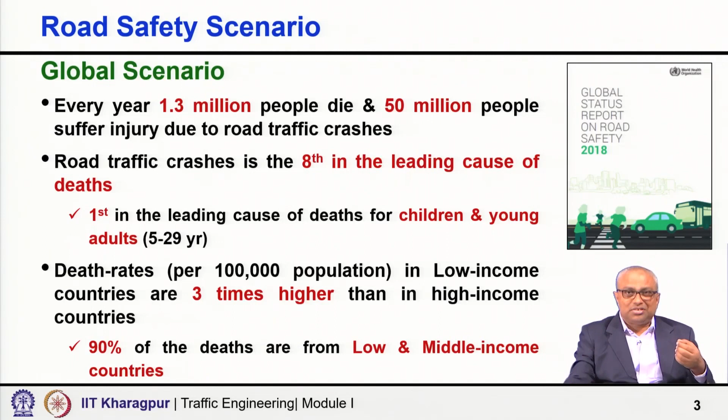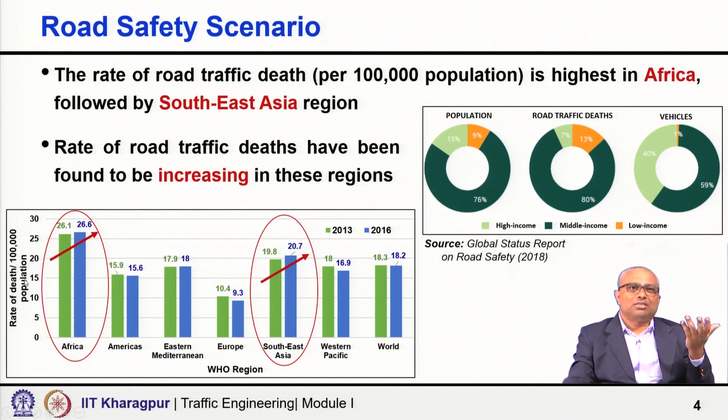The rate of road traffic deaths per 100,000 population is the highest in Africa, followed by Southeast Asia region. If you look at this figure, Africa here, Southeast Asia, the highest bar you can see is in Africa, followed by Southeast Asia, and alarmingly the rate of road traffic deaths has been found to be increasing in this region. I have tried to show you the upward trend in both regions, Africa and Southeast Asia. The present rates are highest in Africa, followed by Southeast Asia, and in both these regions there is an increasing trend in the rate of deaths per 100,000 population.

Now, if you look at the vulnerable road users and their involvement in road safety globally, you will see that pedestrians, bicyclists and motorcyclists are easily injured and killed in road crashes. The simple reason is they do not have any protective shell around them. So if they are hit, their chance or probability of fatality is very high.

These are all to be noted, because they give clear indications of what and how we should proceed further to mitigate the number of road accidents and mitigate the number of fatalities, bringing down the number of fatalities.

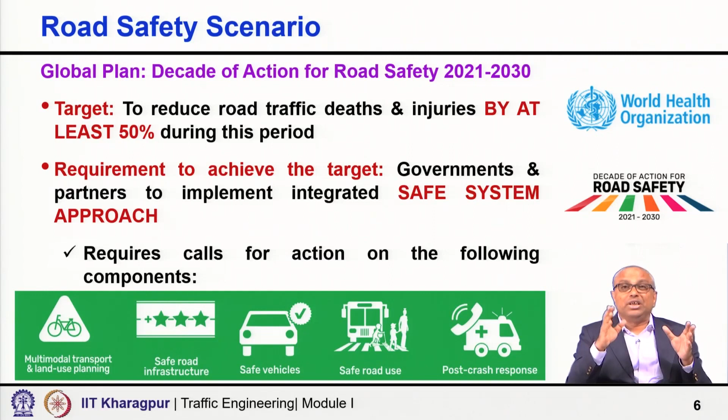Coming to the scenario in India - that was the global scenario. Now, coming to the scenario of India.

In our country, every year 150,000 deaths happen from 450,000 road crashes - not a good thing, very high. And here most importantly, the national highways, which actually include only 2% of our entire road network in the country, account for 35% of the total traffic fatalities - a very disproportionate figure.

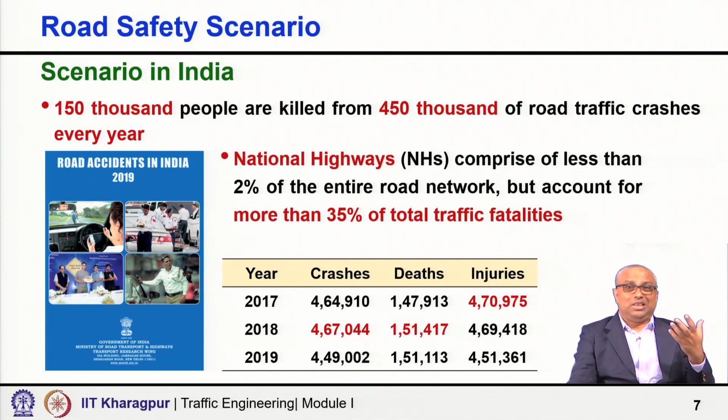So the national highways and also the state highways need to be handled in a much better way, and a relook is necessary in the way we are building them. It is important, no doubt. We need to develop our roads, widening to 4-lane, 6-lane dual carriageway standards. They are a necessity - the economy rolls on transport, and road transport has a very big role to play in the overall economic growth of the country. So we need it, but much more focus is required on road safety aspects. Something is definitely wrong with the way we are developing our infrastructure.

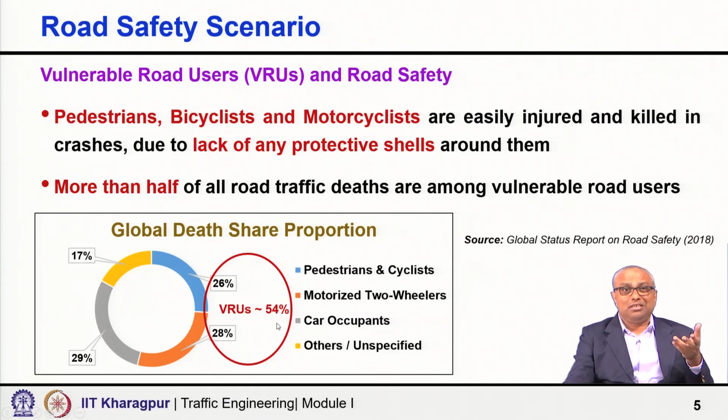If you compare the involvement of VRUs in the Indian context, it is more than 57%, not much different, because globally that share is around 54% VRUs, and here in the Indian case it is around 57%. The share of VRU deaths has increased compared to previous years, especially comparing 2018 and 2019 data - 2020 data, because of the impact of COVID, may be very different. So 18 to 19, motorcyclists are very high, and pedestrians too - the vulnerable road user share is again more than 50% in this case, showing an upward trend, very alarming.

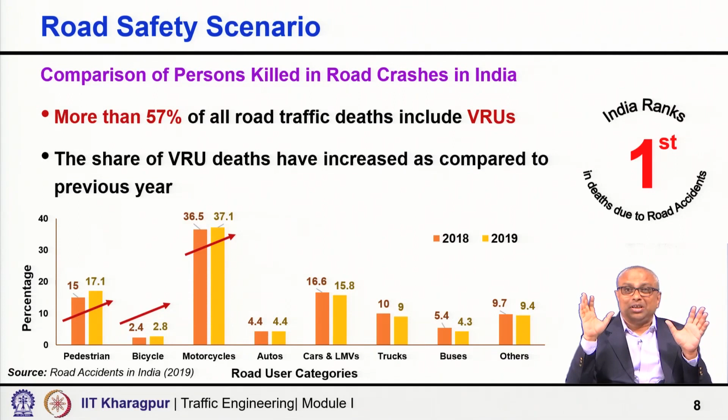And altogether we are number 1 in deaths due to road accidents. We must be very, very careful, and we need a scientific, systematic approach, looking at or accepting the reality. That is what is really important. We have to bring down the fatalities.

Let us look at the causes of road crashes. Why do road crashes happen? Global research indicates that there are 5 broad risk factors. Human factors, for example speeding, drunken driving, no use of helmet or seat belt, violation of rules, distraction - talking on mobile or texting while driving, this kind of thing. Altogether human error, that is one major area.

The other area is unsafe road infrastructure. As I said, creating a road and creating a safe road is very, very different. In many cases we have created infrastructure, but it is not safe infrastructure. So unsafe design and lack of facilities - that is the road infrastructure, road engineering aspect, I should say.

Then unsafe vehicles - in many cases the safety features are missing, and we are cutting down the cost, bringing down the vehicle price to make it competitive in the market, but where are we cutting? Cutting the corners. Where? Cutting the safety features. That again is one of the reasons.

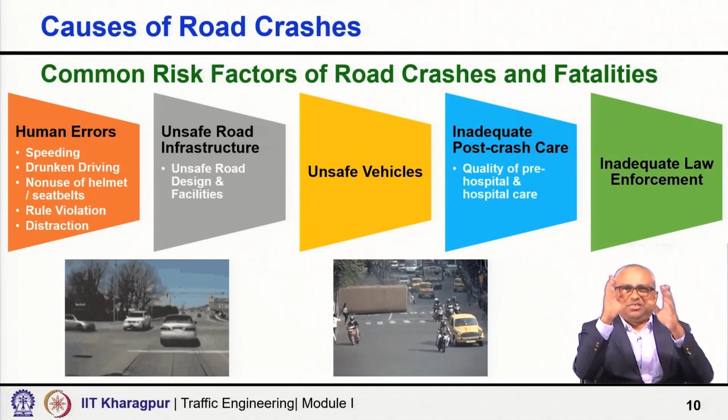So these are the 5 different pillars. In a simple format, who are on roads? People, road environment, and vehicles. So in a very simple way, road crashes may occur due to human factors, external or road environment factors, and vehicular or mechanical factors - somewhat a different way of regrouping these verticals.

These factors sometimes act individually, sometimes together in combination, to contribute to road accidents or road crashes. Look at these shares - there are quite overlaps. Human factors, solely or combined, contribute to 96%. Road environment or road engineering, directly alone or in combination with others, contributes to 28%. So better road engineering is really an issue too. And vehicle factors altogether, alone or in combination with road environment and human factors, contribute to about 8%.

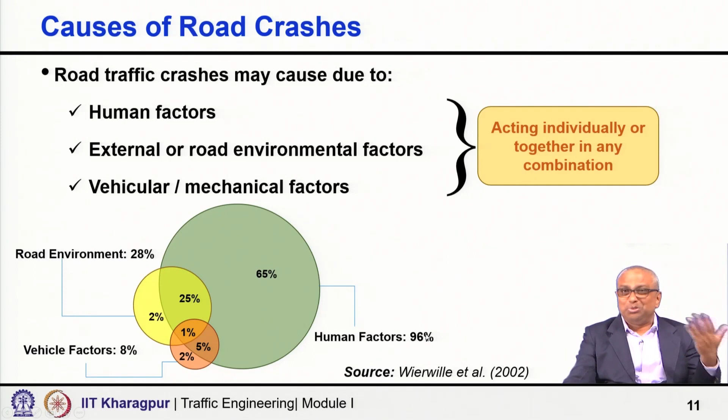Obviously, this 28 plus 8 plus 96 will be more than 100 because there are overlaps.

Now coming to the causes of road crashes reported in India, in the specific Indian context, what is happening? The human factors may include traffic rule violations, drivers driving without a valid driving license, non-use of safety devices, say for two-wheelers no use of helmet, or for motor vehicle four-wheeler users not using the seat belt.

So if you look at it, traffic rule violations have different shares. What are the kinds of violations? The major share you can see is speeding or over speeding. So speeding is a major issue. The infrastructure, the road environment, and the overall road traffic environment compared to the kind of speed that is happening are not compatible. Overspeeding is happening.

So overspeeding may happen because somewhere the posted speed limit itself may be higher than what it should be, and on the other hand there are plenty of cases where the posted speed limits are actually violated by motor vehicle users. So that is what is actually the reality. The share of road crashes due to rule violation, overspeeding or speeding, contributes to more than 70%, very very important.

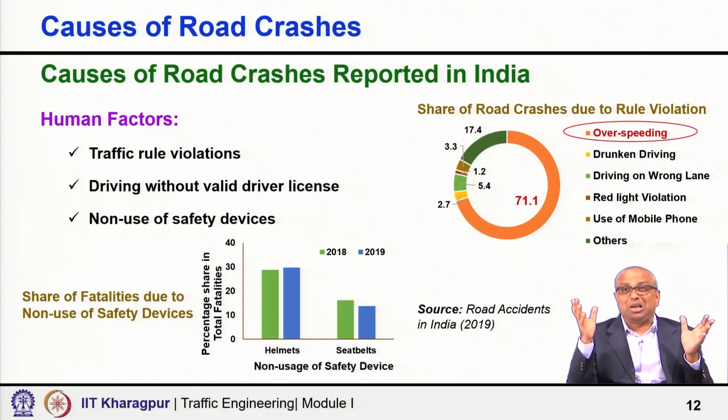Road environment factors may include land use type. What is the type of land use? You will find that national highways passing through areas which are like semi-urban development, markets are there, activities are there, schools, colleges, offices are located very close to the roadway, and there is no protection to vulnerable road users, no facility is provided, they are just simply crossing the road, looking at the gaps in the traffic, with no segregation, no protection to vulnerable road users.

Land use type, road infrastructure, say straight segment, curved segment, sharp curves, steep slope, type of junction and type of control I have already taught you, weather condition - all these are contributing to road accidents and fatalities, which we can call road environment factors.

Vehicular factors may include over-aged vehicle, the age of the vehicle, vehicle fitness is a major issue, and also the overloading of vehicles.

Yes, we cannot say that there is no action, no enforcement, but the same focus, continuous, every day, 24/7, 365 days in a year, same level of enforcement against overloading is missing. The vehicle fitness aspect has plenty of lacunas.

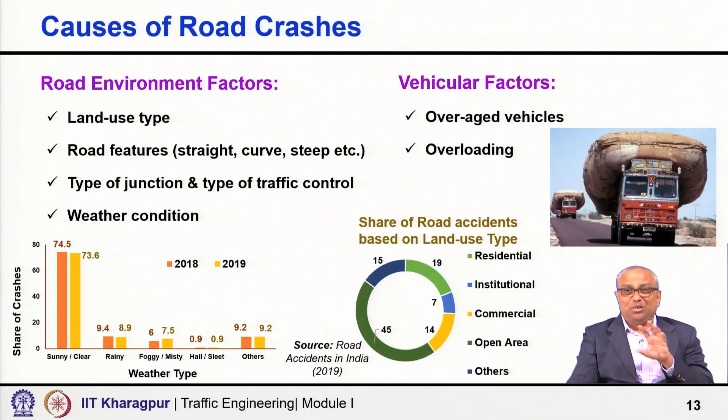Let us look at the factors influencing human characteristics, because a very large share is human error or human characteristics playing a big role. So let us look at the factors which influence human characteristics, and I wanted to tell you why we need to be so careful. One is the kind of data that itself shows human characteristics are very important and we need to focus on that. They contribute and have a big role, and because of the issues related to human characteristics, you may find problems such as microsleep, such as distraction, which may lead to road crashes and fatalities.

Microsleep is the sleepiness often combined with repetitive monotonous driving tasks, long time driving, especially for commercial vehicle drivers or tour and travel agency drivers who drive continuously. It may be a monotonous thing for them, and the drowsiness lasts for a fraction of a second or up to a few seconds. All these may contribute to microsleep.

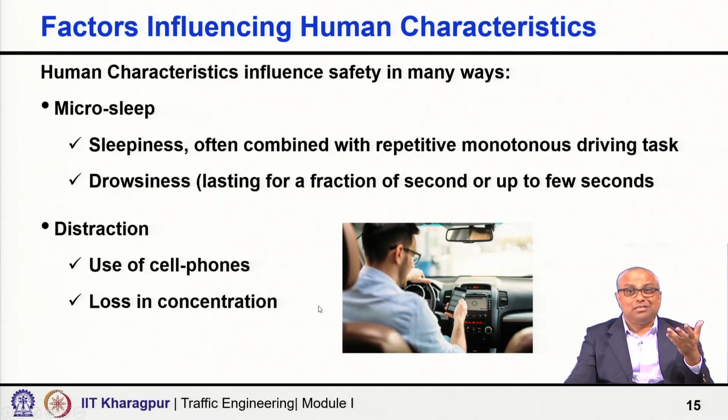Similarly, distraction may happen because you are using a cell phone, or somehow a loss of concentration happens due to several other reasons. So distraction, microsleep, these kinds of things are closely related to human characteristics, and all these may lead to road crashes and cause even fatalities.

So what are the human characteristics? What are the factors that are influencing human characteristics? Not the human characteristics, but which are the factors that are influencing human characteristics.

There is the driver, vehicle and road system altogether, where we recognize that the driver receives and processes inputs from the operating environment, road and vehicle, and then makes prediction, assessment and takes decisions on what is the appropriate action, then executes those actions via the vehicle, maybe pressing the brake pedal to stop or decelerate or change lane, steering action, brake action, acceleration, deceleration, all these happen, and receives feedback about their effects from the environment.

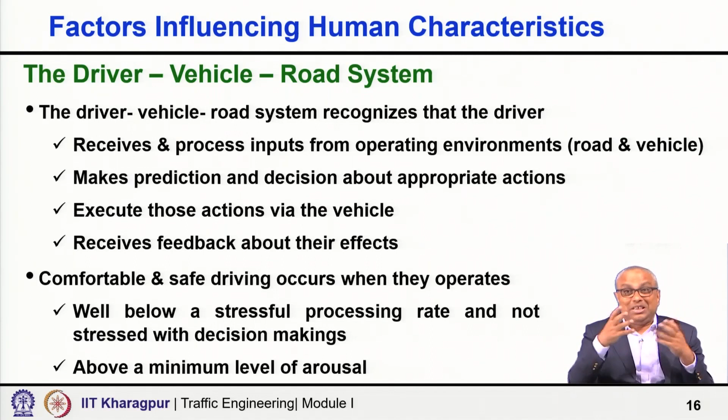Comfortable and safe driving occurs only when they operate well below a stressful processing rate and are not stressed with decision makings, and above a minimum level of arousal - a minimum level of awareness, consciousness, alertness - and not doing any maneuver or processing which is stressful, and not taking decisions under stressed conditions. These are very, very important, and these are directly coming from the human characteristics.

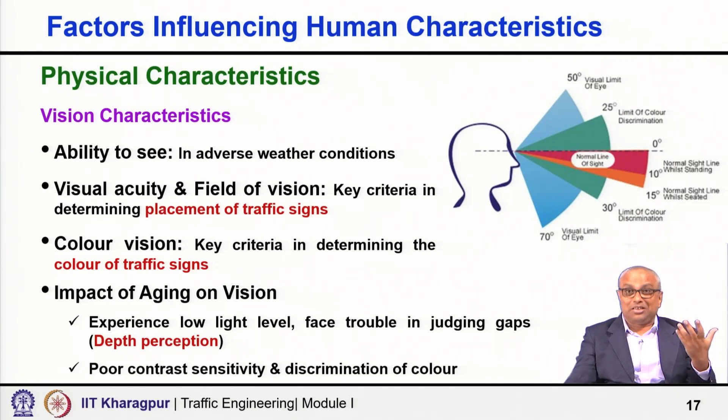Physical characteristics also influence the overall safety scenario, very important. Say vision characteristics - I have taught you these, for example, ability to see, visual acuity and field of vision. I mentioned all those right in the beginning, module I. So I am only touching upon those to show you the linkage among those characteristics and road safety issues. So placement of signs is getting decided based on this, which is very important and thereby influences safety. Color vision - whether I am able to recognize signs and signals properly. Impact of aging on vision, very important.

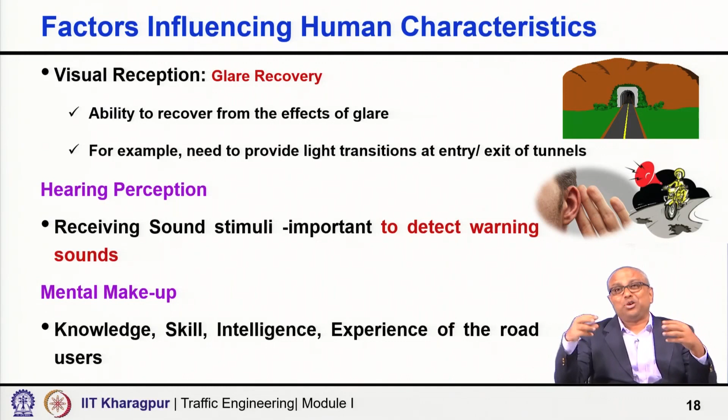Visual reception, or for example glare recovery. Hearing perception to detect warning sounds. Mental makeup - knowledge, skill, intelligence, experience of the overall road users. So now you know the linkage - what are the factors that influence human characteristics and how the linkages happen with road safety.

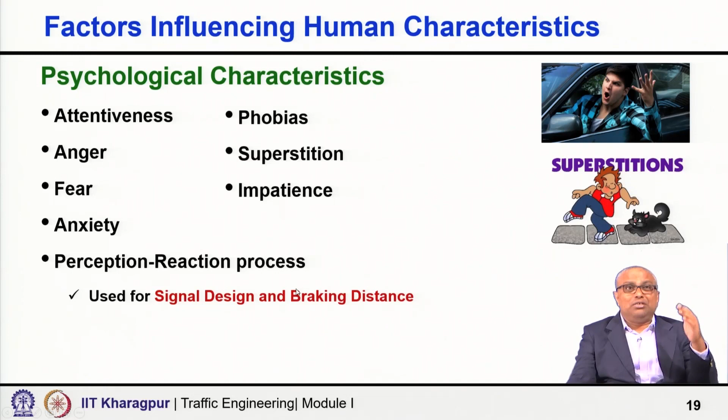Psychological characteristics, again very important in the context of road safety - they are also human characteristics. For example, attentiveness, anger, fear, anxiety, impatience, superstitions, phobias, perception reaction process - all these are important. For example, perception reaction process is very important for signal design and braking distance, and other characteristics too. If you are angry when driving and behave in a crazy manner - when congestion is there, just be calm and quiet, accept that there is congestion, it will take a little longer time. If you become crazy and start doing maneuvers in an unsafe manner, eventually that may lead to a road crash. So every aspect is very important - psychological characteristics.

Environmental characteristics are directly linked with safety. Traffic stream characteristics - traffic flow, travel time, slow moving, fast moving, motorized, non-motorized, all those. Facilities for traffic, type of road, roadside facilities, atmospheric conditions - for example weather condition, visibility during fog, during rainy season. When it is raining or when there is fog, it influences and impacts driving, so you have to be careful. Locality, type of land use - very important, especially in the Indian context.

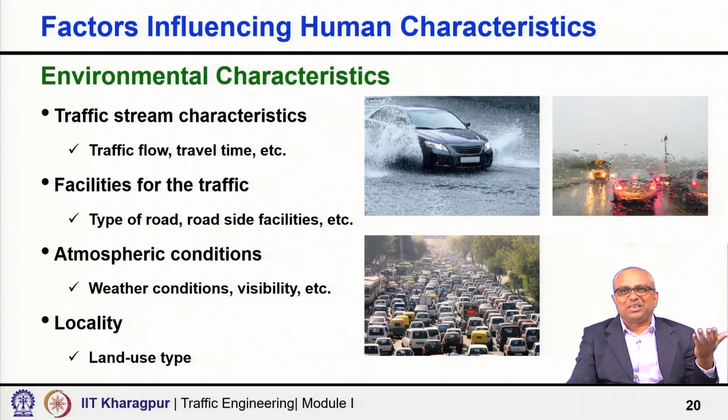There are several other factors which influence human characteristics, for example pavement marking. The importance of pavement markings and their influence on safe driving is well known, especially during night time driving. The road and the outside carriageway portion all look black, because in most cases the roads are bituminous pavement, which looks black. So the painting, the road marking, is really extremely important.

It tells you clearly that is the road portion, especially during night time and also while driving in difficult weather conditions. When it is raining, foggy or snowing, the visibility is low, then this marking really is very important, and also for old age drivers who probably otherwise have some issues related to vision.

Edge lines especially have very significant impact on roadway departure crashes. Lane markings are also very important. You cannot drive, you cannot have a high speed facility without lane marking. The longitudinal markings, lane markings, edge markings are very important because while you can assess the distance between two vehicles, the lateral placement, where exactly you are located laterally, is very difficult to assess.

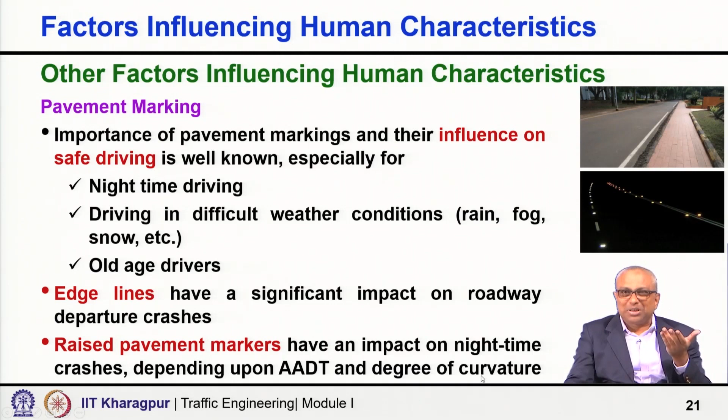Retroreflectivity in markings and signage, again a very important factor. I am only touching upon these things again, you already know road marking types, driver characteristics, vehicle characteristics, to show you the linkage with safety. For safety, everything is important. So do not think it is a requirement just like that, it is a requirement for the safety. There is a direct linkage.

Retroreflectivity, as you know, is a measurement of the efficiency of a pavement marking to return light in the general direction from which it came. Generally, in terms of road pavement, this is achieved by putting glass beads or prismatic cube corners on the marking material.

More innovation is happening, and these days very high quality retroreflective sheets are available which you can use as road signs, giving very good retroreflection. Even the paint, the road painting or road marking, can also give you very good retroreflection, provided you use a very good quality material.

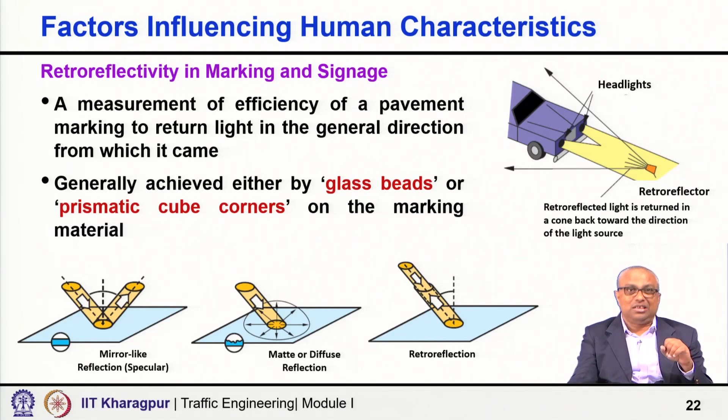So altogether what we discussed in this lecture is about the road safety scenario, the global scenario and the scenario in India, how the road fatalities are happening, at what rate, how the vulnerable road users are involved, how the trends are changing, and some of the very important findings from the data that tell you why road safety is important, why we need to focus on various aspects, where more focus is necessary, and how to move forward in a scientific and systematic manner.

Then we discussed the causes of road crashes, the common risk factors of road crashes and fatalities, the causes of road crashes as per the road crashes reported in India, the factors affecting human characteristics, because human characteristics have a big role, and then I discussed the driver, vehicle and road system, how the feedbacks and everything happen and why human characteristics are important. Then various physical, psychological and environmental characteristics which impact or influence human characteristics and behavior, and other factors which may have an impact on human characteristics.